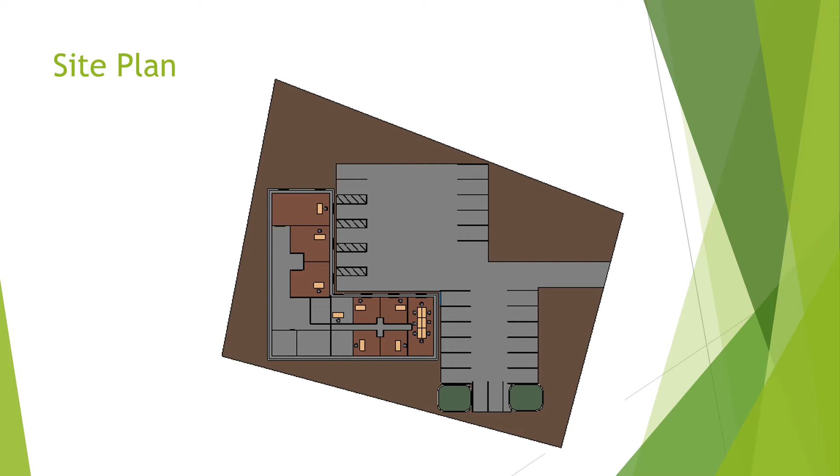Here's a quick view of the site plan. When we get into our 3D walkthrough, we'll be able to take you through the entire building, but you can see the layout of our site.

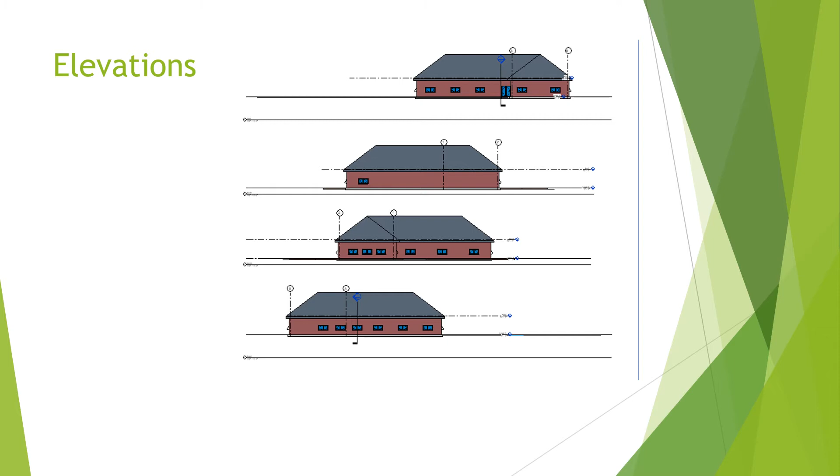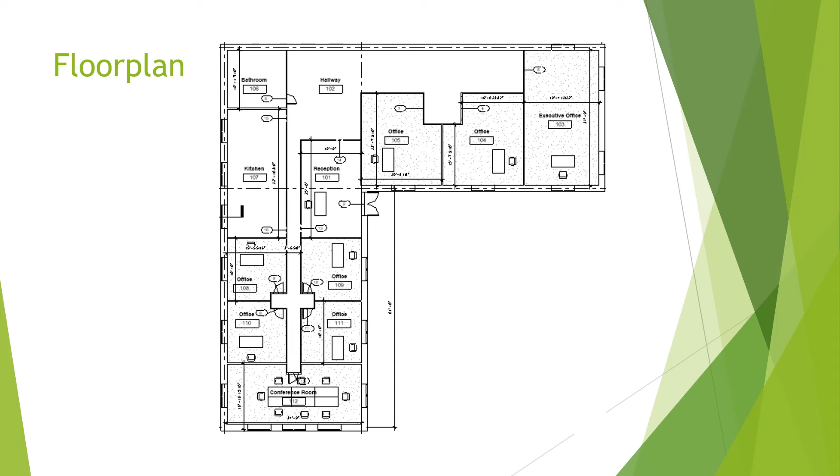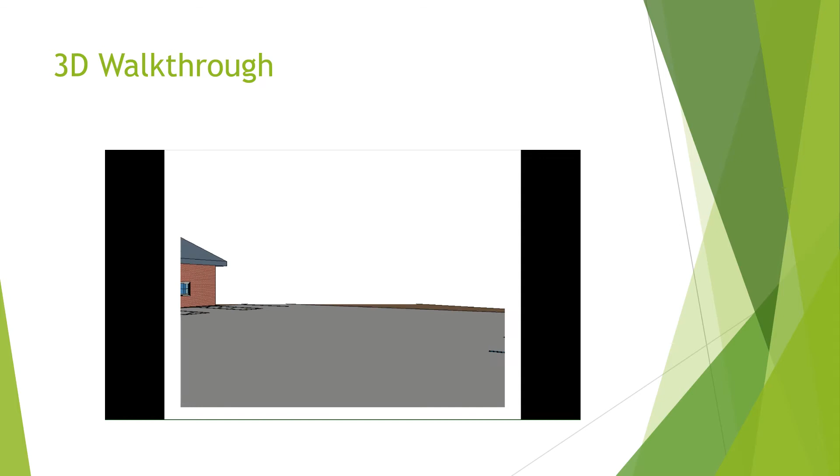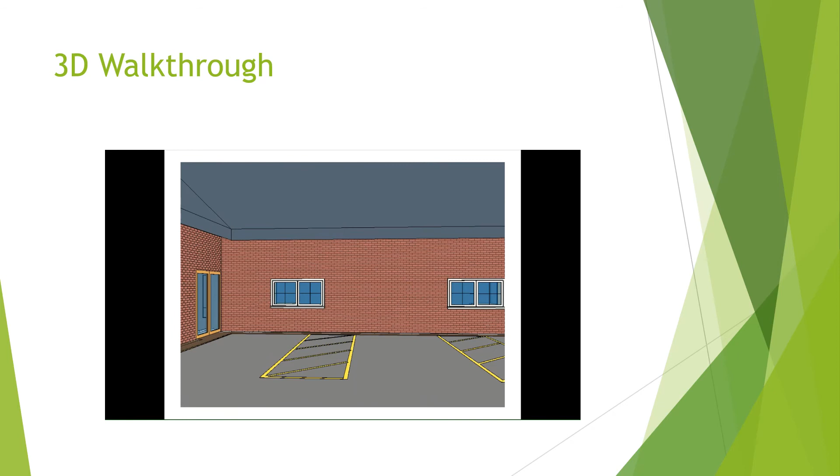Coming back around, we come into the main area. Our ADA spots and our bicycle spot are going to be all the way on the far right hand corner, and then all these larger spots are the ADA spots. As we continue through, we'll be coming through these glass double doors into the reception area.

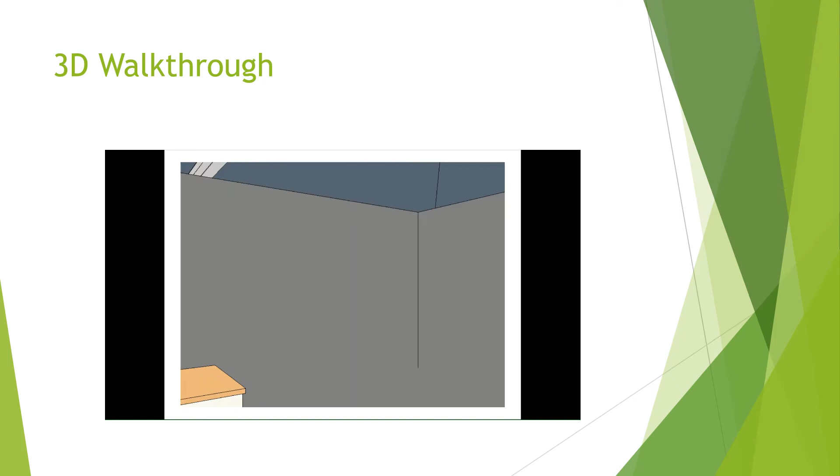Something to note is once we come in here, the flooring is going to be tile, and above us is a steel beam. It's the only steel beam that we have in the property because of the longer span that we have to go through there.

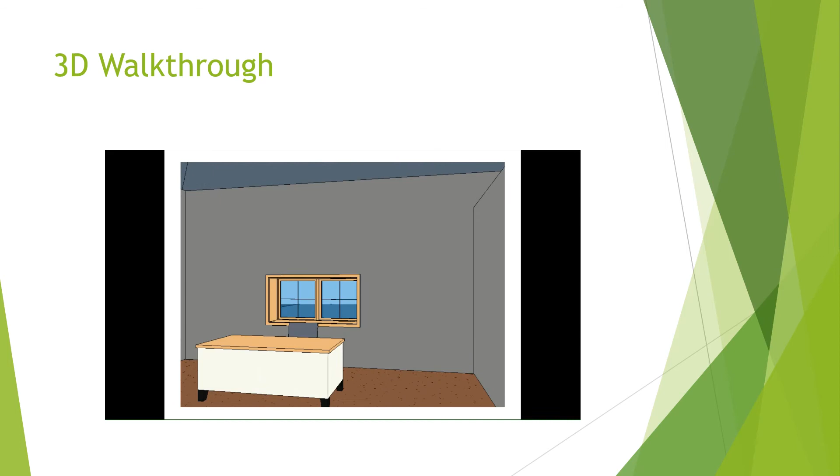Coming through our hallway, as we come in, we take a right, and this is going to be essentially the president's office, whoever owns the company, or the biggest office space here, and it's also the most removed from the rest of the area. That's going to be some carpet flooring, and obviously we have some FF&E furniture in there.

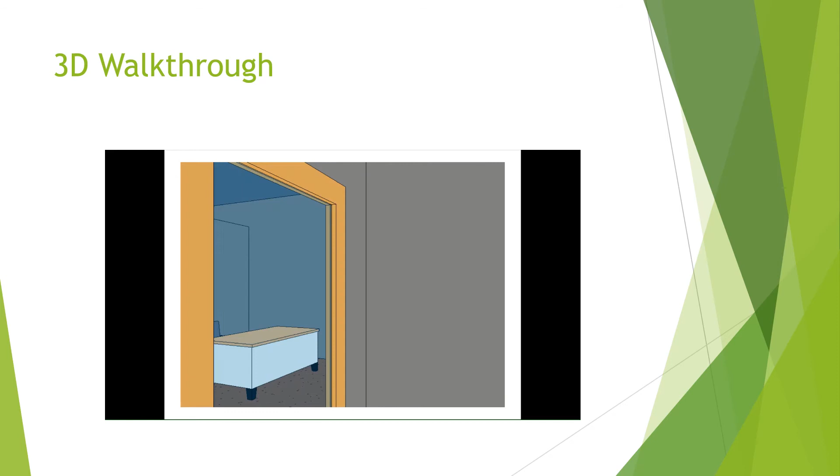All double paned awning windows that open out, and continuing to walk through here, all tile flooring once again until we get into the offices. They all have carpet, and this is one of the executive rooms, so it's a larger floor plan than the rest of the other offices, which we'll see in a second. There's two of those, and that is just accompanied right next to the president's office.

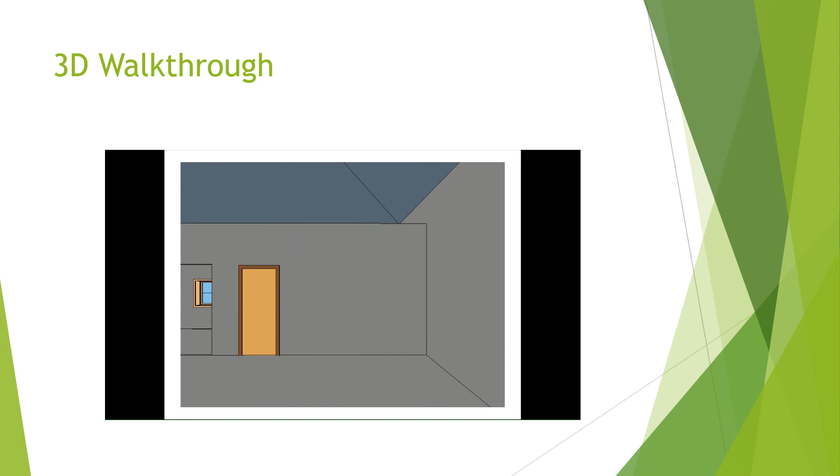Walking through this door is an unfinished bathroom, and it's obviously tile flooring as well, not a whole lot to see in there at the moment. No fixtures or any plumbing finishes in there right now.

So this right here, we're walking through the kitchen now, and you can see that steel beam again. It's a very long room, kind of allows us to see outside, which is a pretty nice view.

And here we go into one of the smaller offices. There are four of these. Getting a pretty good view of the walls there, but essentially seeing the size of the space.

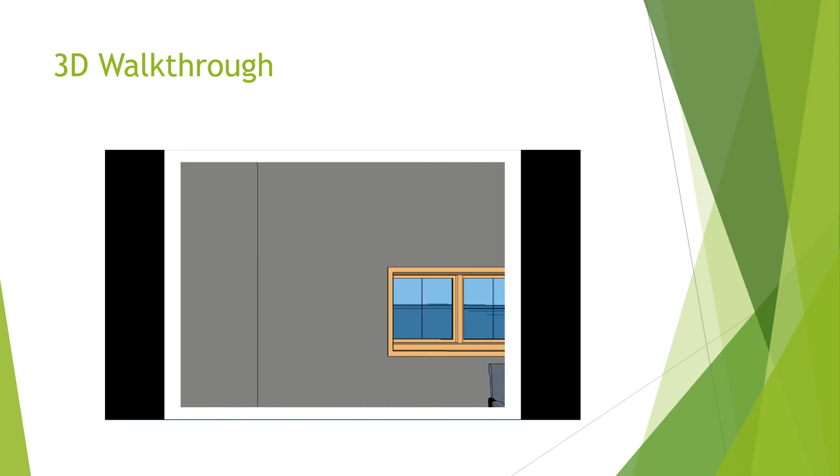As we come down, we make ourselves a right, and we come into the conference room. This is obviously the biggest room in the building, and this is for large meeting areas and any meetings that we have.

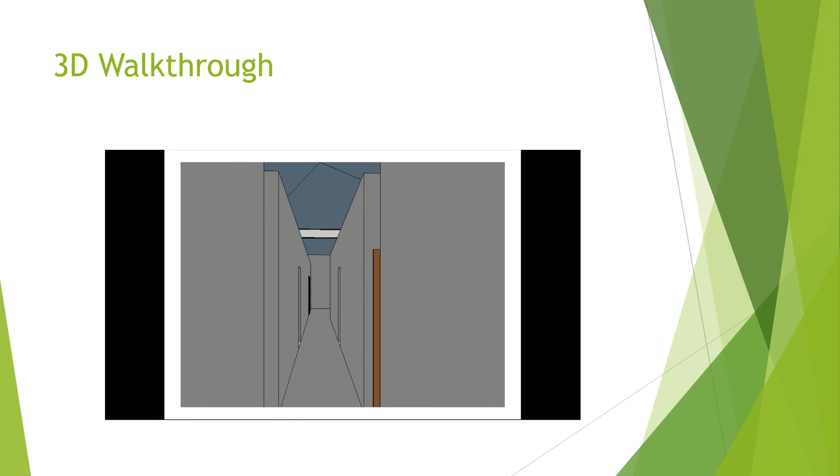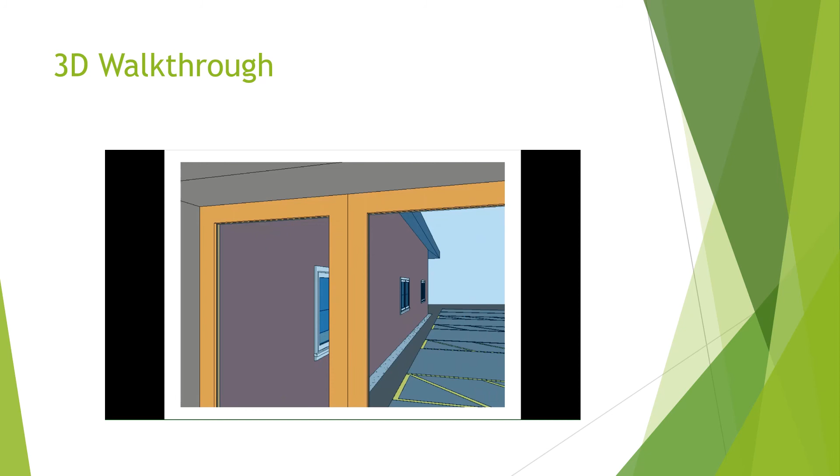So walking back down, those are the four smaller office spaces right there. We're going to have the kitchen to the left, and then back into the reception area as we are walking back out.

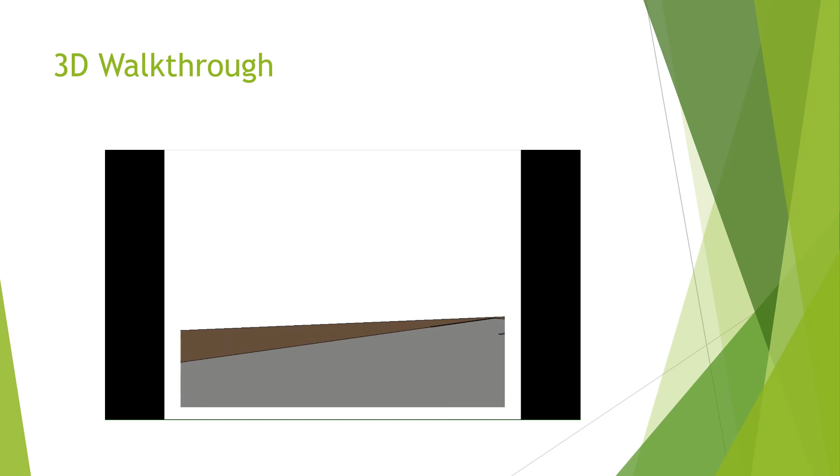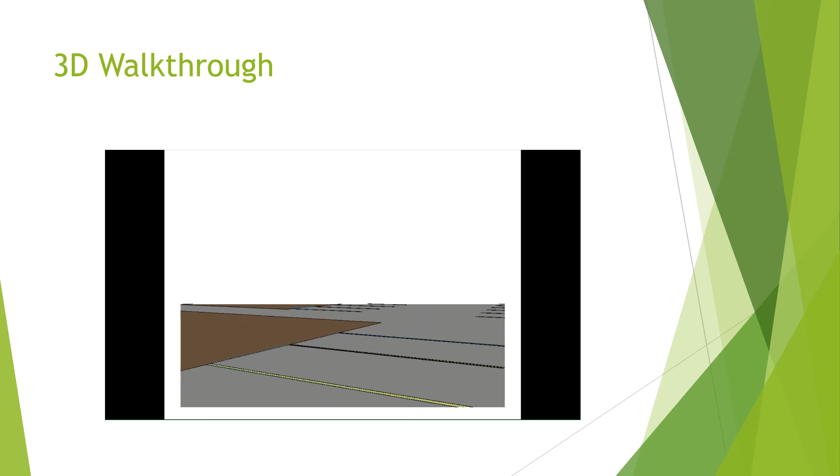ADA rooms, and then our bicycle spot all the way there on the left, and we're going to go back around here, so we would be facing essentially the main road right here and the property adjacent to us on the east. Then we'll just turn right back around to finish this little presentation, getting one last glimpse at the property itself. Obviously all this is green space, but it's brown right now because it's all unfinished.

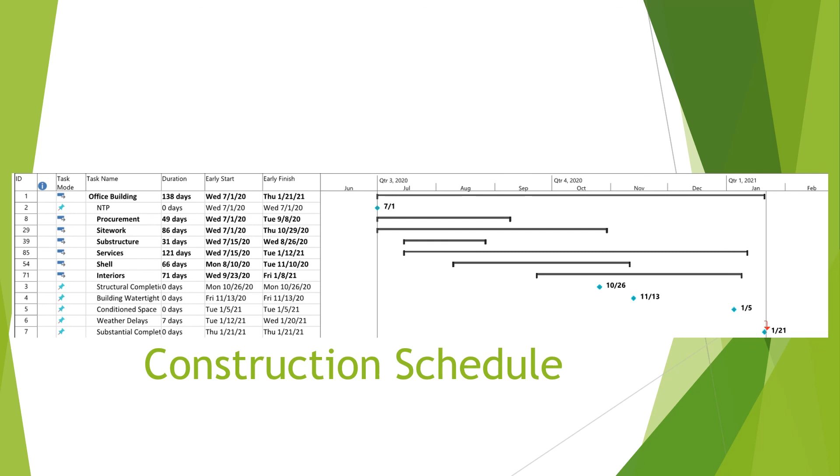And I really like this little summary schedule here because it shows a lot of our milestones as well. So even though we're getting a very hands-off schedule here, it kind of shows all the major components and when everything's going to be finished.